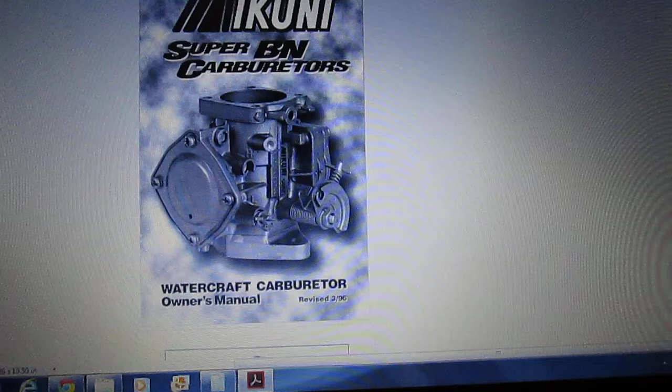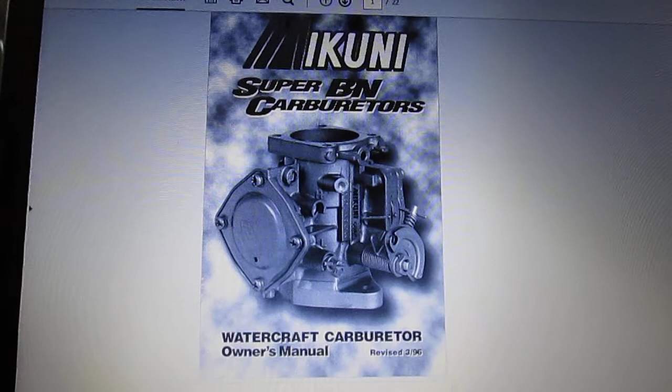Hey guys, I'm going to make a short video about the Mikuni Super BN carburetors. This is a manual I have, a Watercraft Carburetors Owner's Manual. I own a few Polaris SLTs and I'm working on an SLX now. There's a lot of talk online about which is the correct needle and seat size to use and what pressure you should run, so I wanted to go through this with you guys.

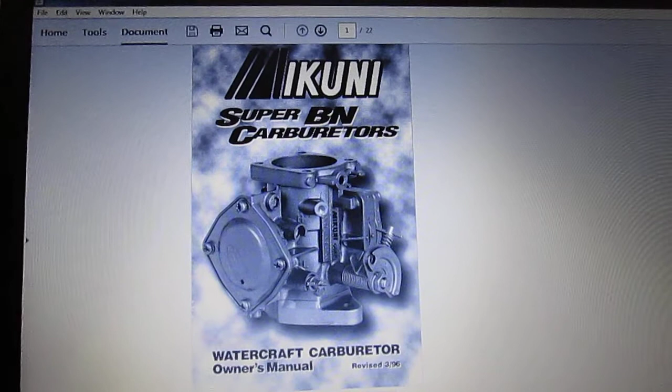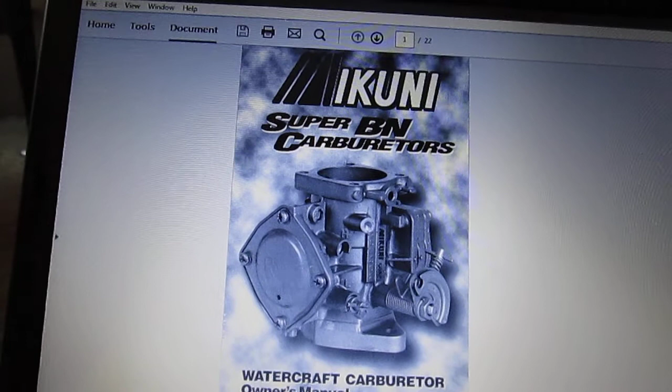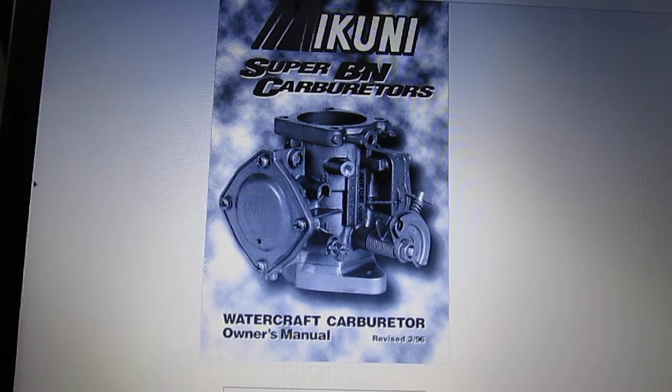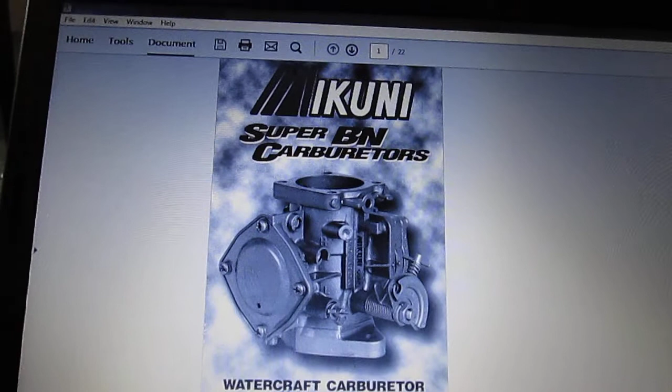Currently, Polaris says they want your pop-off pressures to be between 10 and 18 psi. That's, I believe, from 1992 to 1995 Polaris 650, 750, and 780 model Fuji engines. Trying to locate what size needle and seat in each of those owner's manuals, they never seem to indicate the actual size. I've talked to some people over the years and they recommended using the 1.5, but I found this manual and thought it would be an interesting talk that would explain things more correctly.

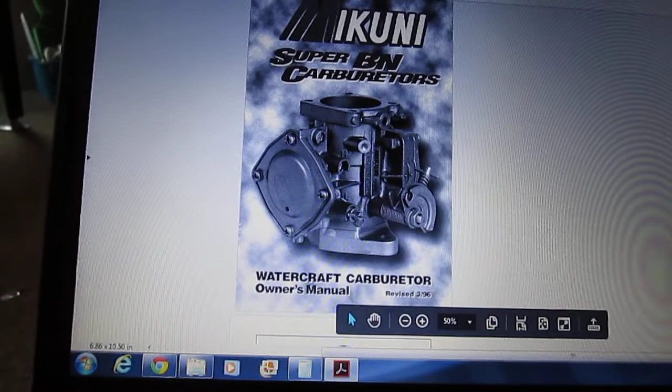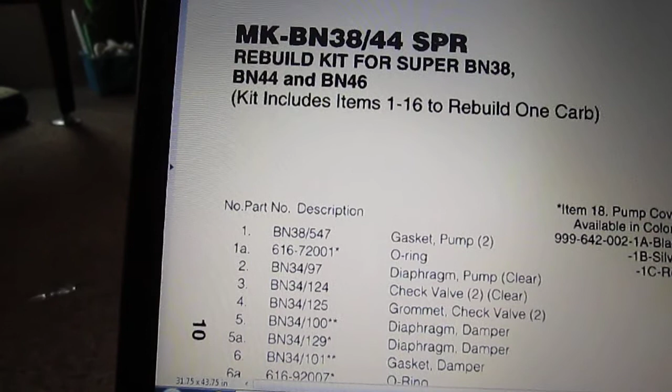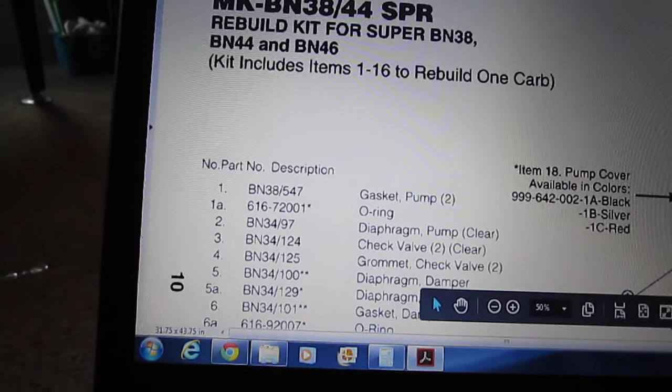So I'm going to skip right ahead to page 10 of this manual. Page 10 shows the MKBN 38/44 SPR. This is basically the 38/44 Venturi Super BN carburetor that comes on most of our Polaris jet skis.

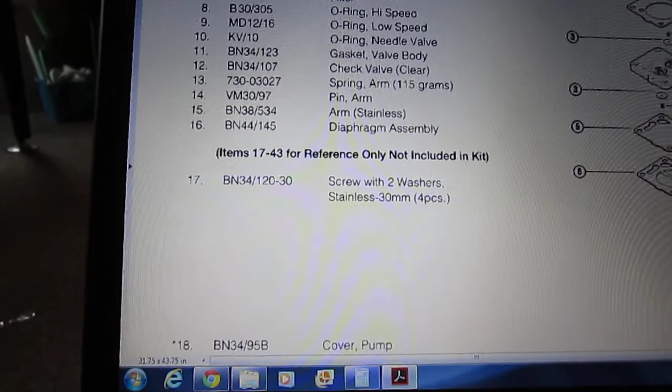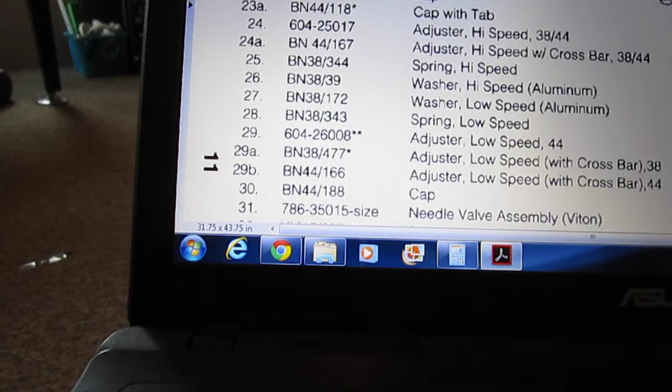If you scroll down here, let's see, here it is, item number 31. Item 31 says the needle valve assembly, Viton, the part number is 786-35015, and it actually says /size. 35015 is a 150, so that is the size they recommend for their stock OEM carburetors out of the box. It comes with a 150.

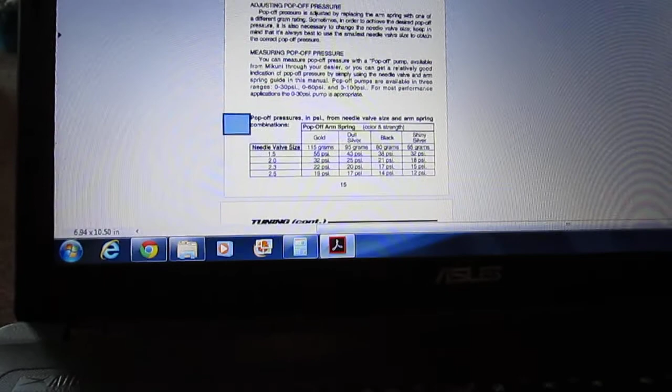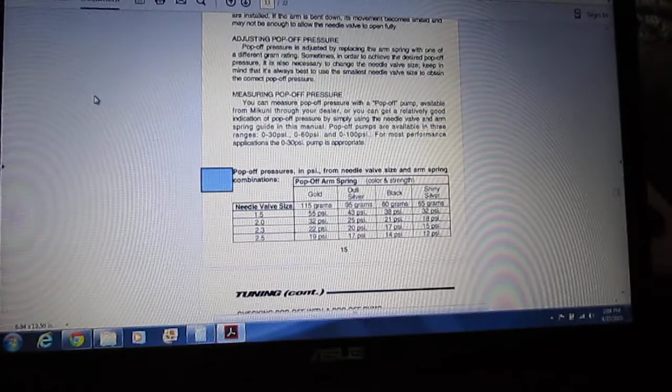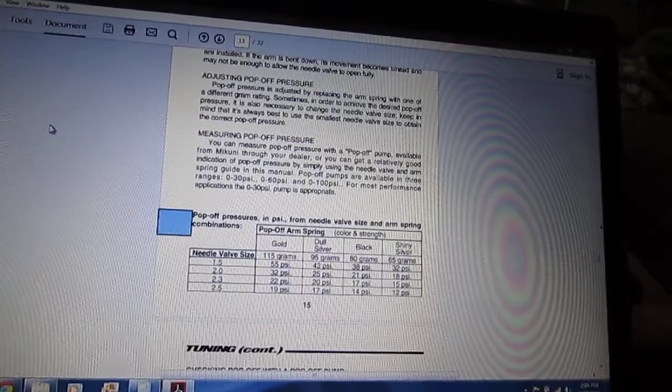Now if you scroll down to page 13 in their manual, it will tell you about measuring pop-off pressures. You can measure pop-off pressures with a pop-off pump available from Mikuni or through your dealer, or you can get a relative good indication by simply using the needle valve or arm spring guide in this manual. Pop-off pumps are available in 3 ranges: 0 to 30, 0 to 60, and 0 to 100. For most performance applications, a 0 to 30 psi pump is appropriate.

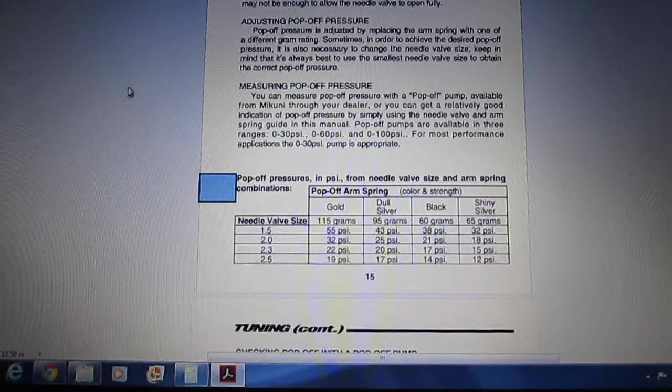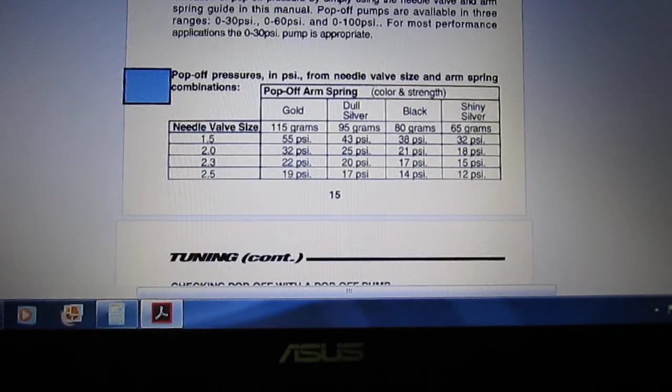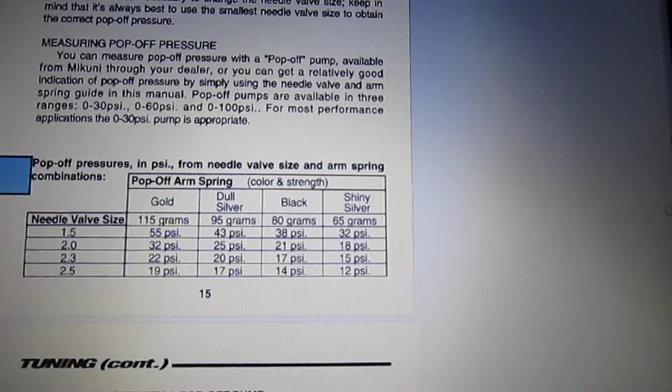So Mikuni has basically a guide right here that tells you what needle and valve sizes you can use and what pressures you can assume to get with each of those different size springs. So with the stock 1.5 needle valve with the shiny silver spring that Polaris generally used, the 65 gram spring, you can expect to have 32 psi pop-off pressure.

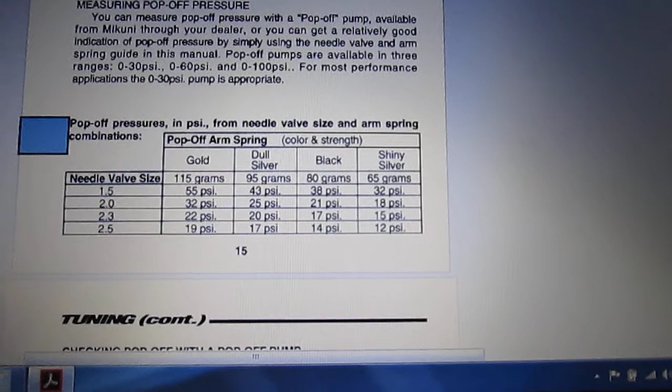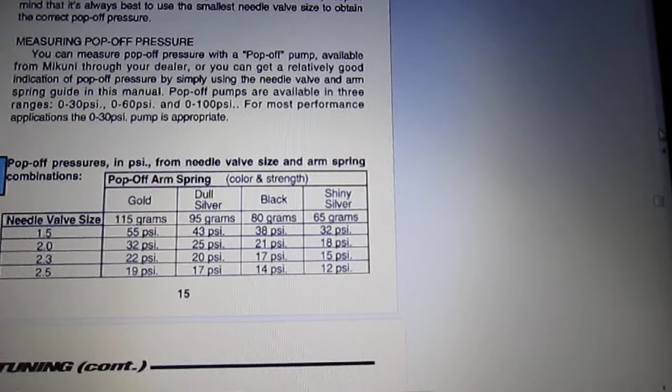Now Polaris recommends 10 to 18 pounds of pressure. The higher the pressure, the less throttle response you'll get. When you nail the gas, if the pressure is lower, you're going to get more gas sooner; if the pressure is higher, you're going to get less gas. But this manual does state you should use the smallest needle valve possible based on what pressures you're trying to get.

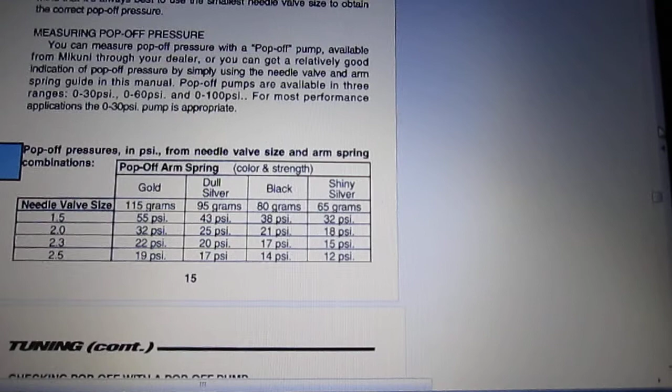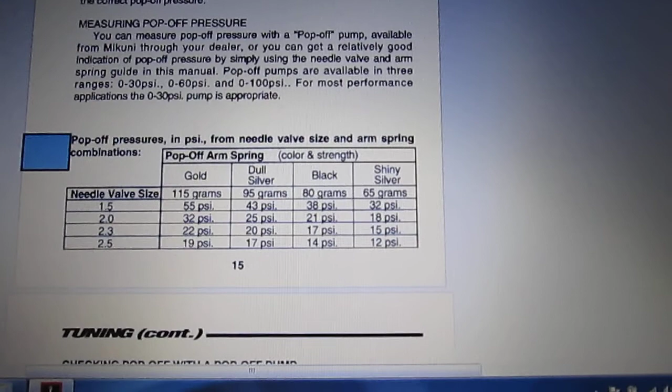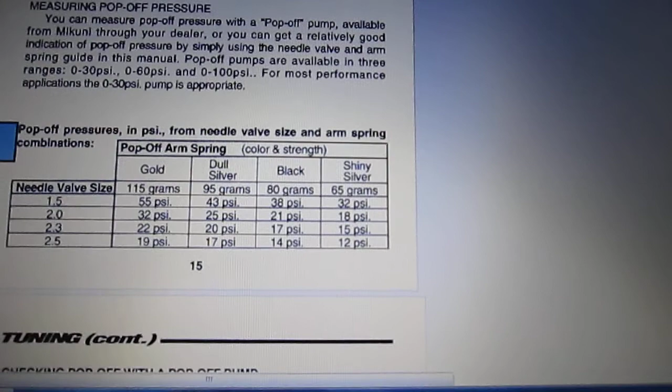So in theory, for my Polaris SL 780 that I'm working on now, I would use a needle valve size of 2.0 with the shiny silver 65 gram spring. That would give me 18 psi pop-off pressure. Again, Polaris recommends 10 to 18.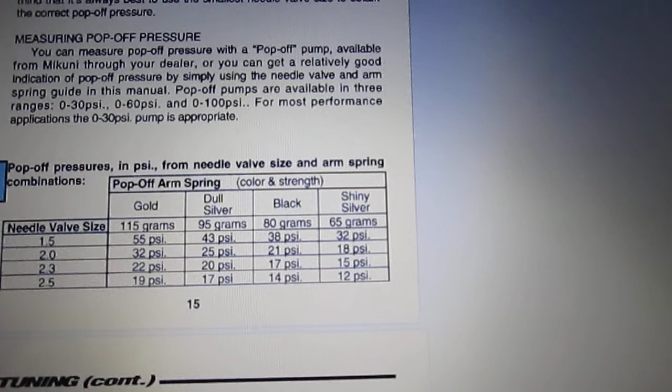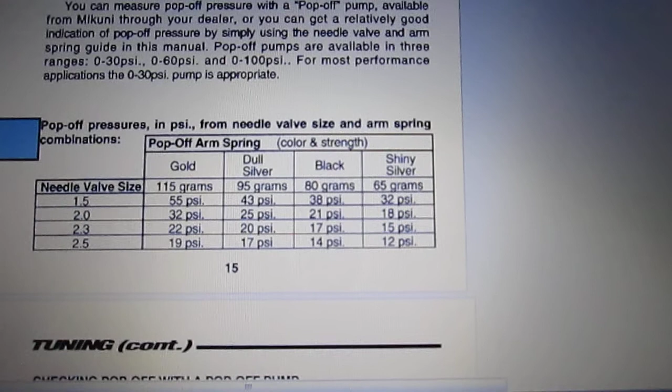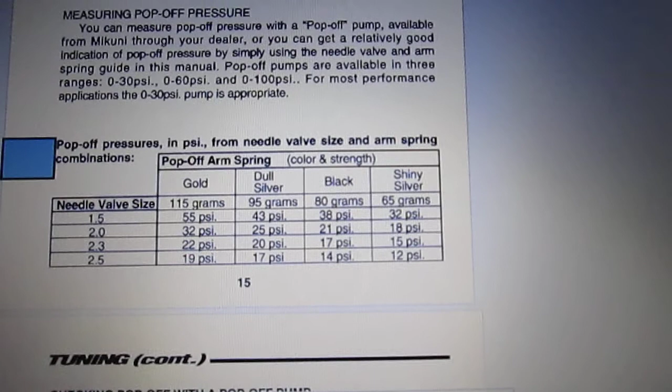Now, a lot of times when they give you such a wide margin, 10 to 18, I would split it in half and go to a 2.3 at 15 psi. A 2.3 at 15 psi will give you, you would assume, more fuel right when you nail the gas. But they also say that with the lower pop-off pressures, if you do a lot of idling through the 5-mile-an-hour zones and things like that, because of the lower pop-off pressures, you could actually have a load up problem at idle.

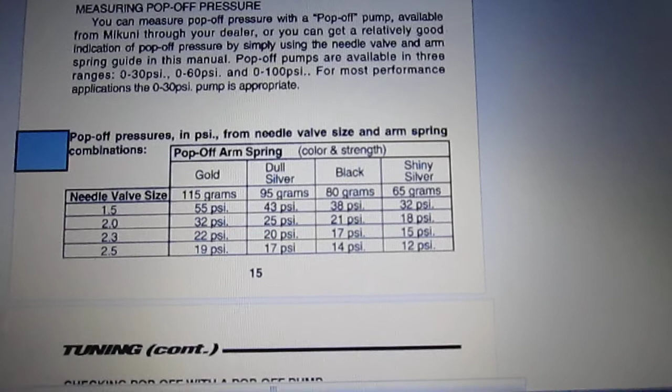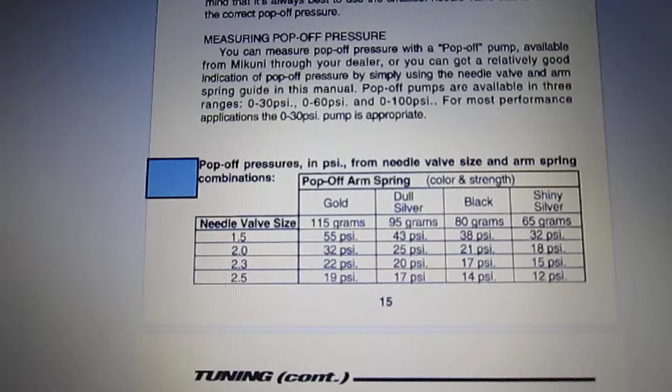Where your jet ski starts to load up and you're fouling plugs, that could be because your pop-off pressures are too low. But honestly, between 15 and 18 is really not a big deal. I think for me, I'm going to use a 2.0 needle valve size. That'll give me 18 psi of pressure, and I think we'll be good.

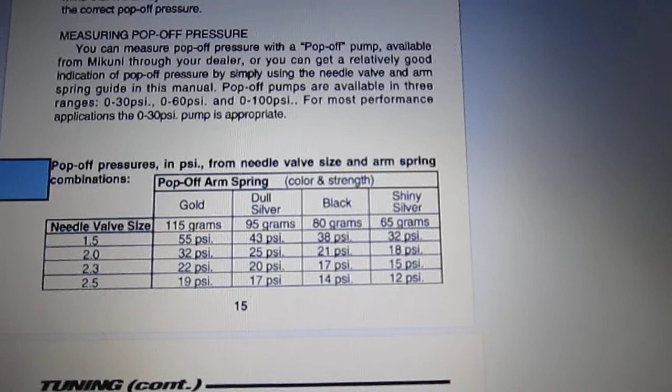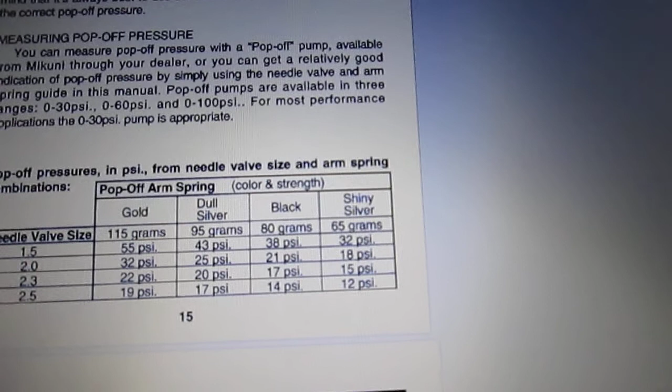Now, if I needed to get less pop-off pressure and I'm using the 65-gram spring, I could take the spring back out and cut half a ring off, and that would give me less spring, which would then lower my pressure.

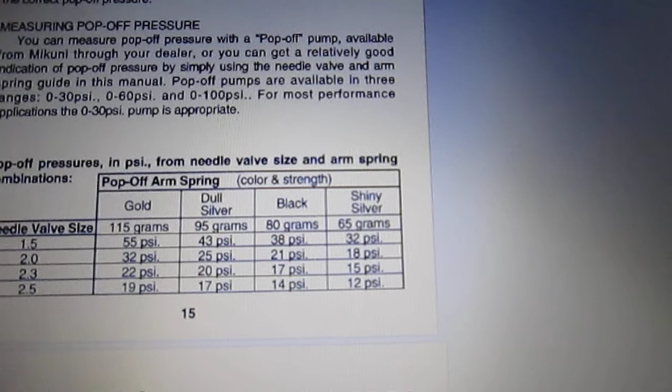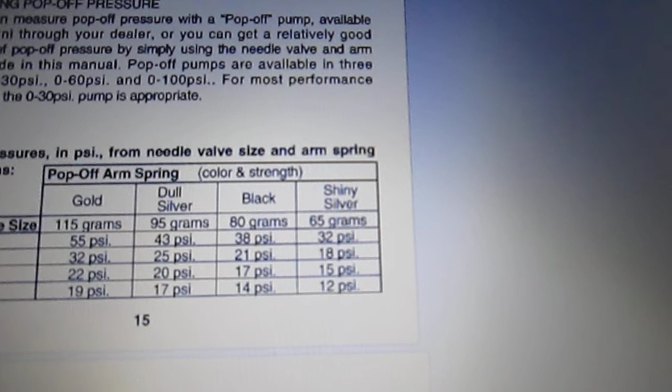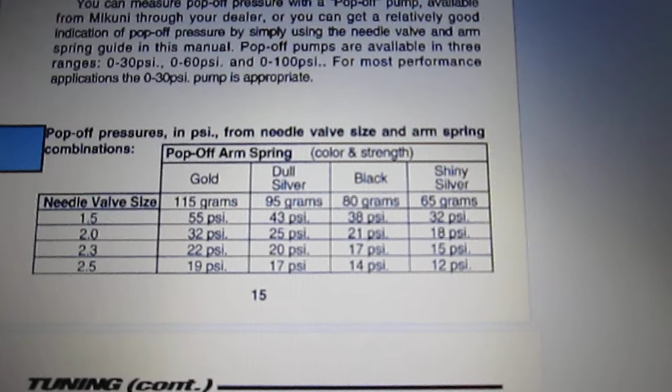Now if I went to the needle valve size of 2.3 with the 65-gram spring, I would have 15 psi. But if that pressure was not high enough and I wanted to raise it, I could just put the 80-gram spring in, which is 17 psi, and that would keep it from opening quite as fast.

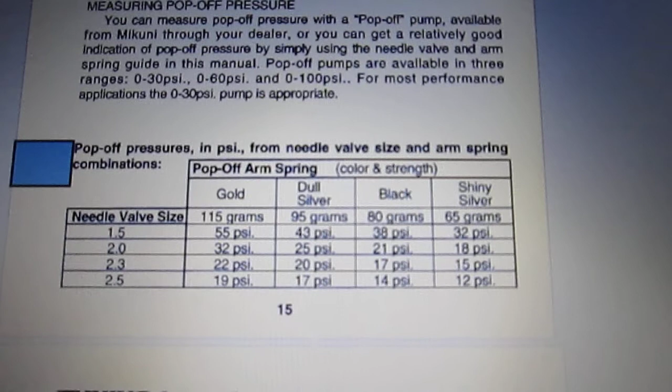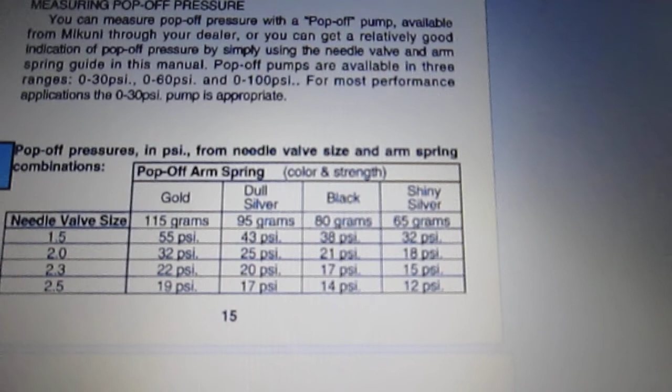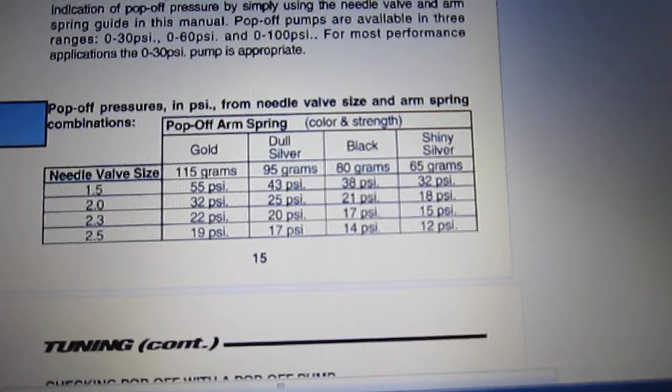So I could go with the 2.3 with the 80-gram spring, and then if I'm not getting enough fuel out of the hole when I nail the gas, instead of replacing the whole needle valve, I could just change the spring to the shiny silver, and it would lower my pressures. But anyway, from what I have learned over the years, I recommend a needle valve size of 2.0 with a shiny silver 65-gram spring to give you a pop off of 18 psi.

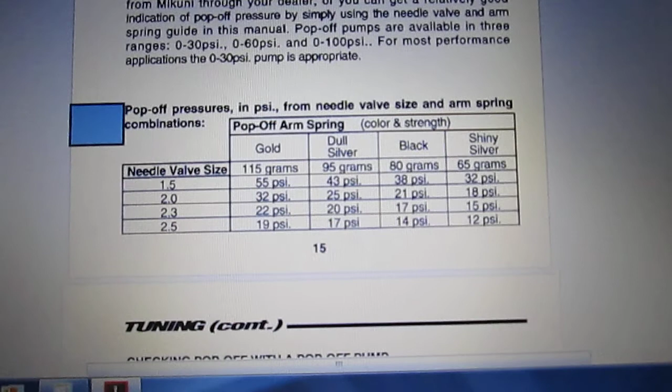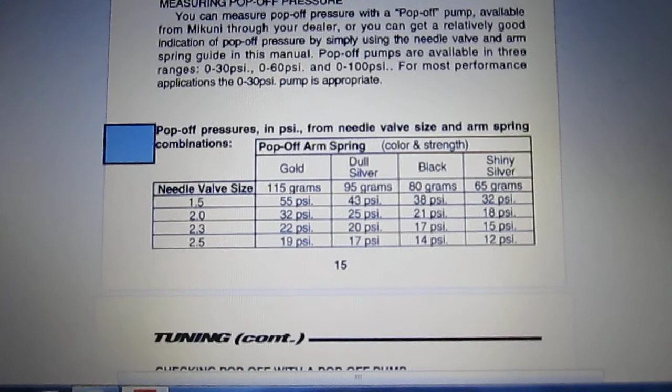So I hope that helps you guys out and explains a little bit more of how the pop-off pressures work and what you should use. So again, if you use a 1.5 with a shiny silver spring, you're going to end up with a pop-off pressure of 32 psi, which is way too much based on what the manual says. All right, have a great day.